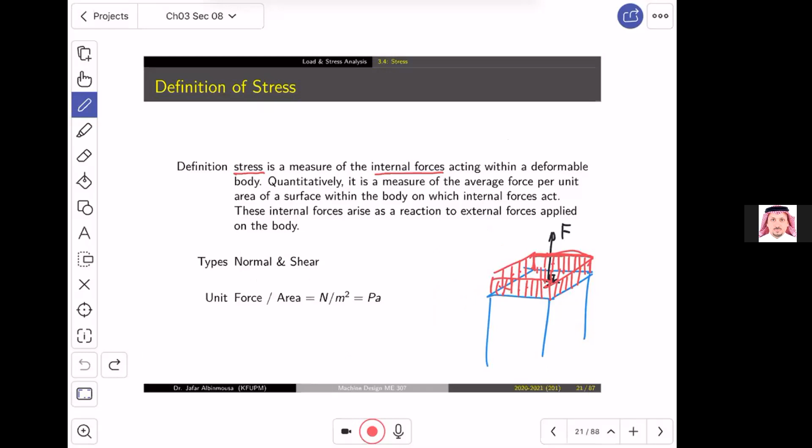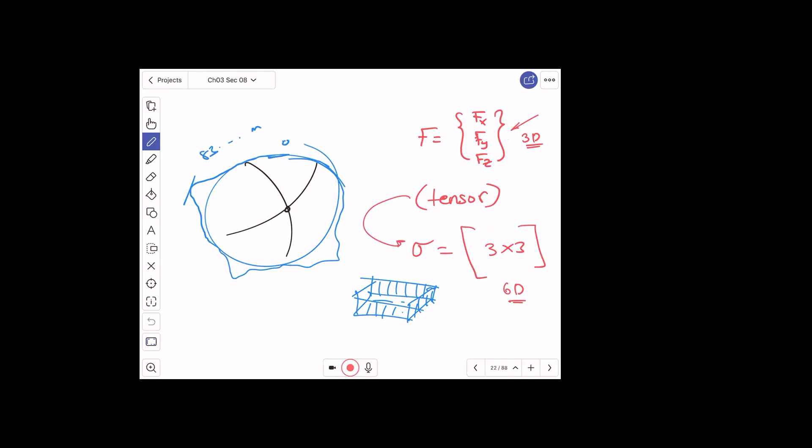Okay, akhwan, all right. So last class we stopped right there, when we talked about stress. We said that stress is a field, and mathematically it's a tensor, not a vector. We said that probably the best way to describe stress is by a surface. Whenever there's a surface, you cannot just point to a value of the surface without telling me where on the surface you want me to measure it. This is pretty much what stress is all about.

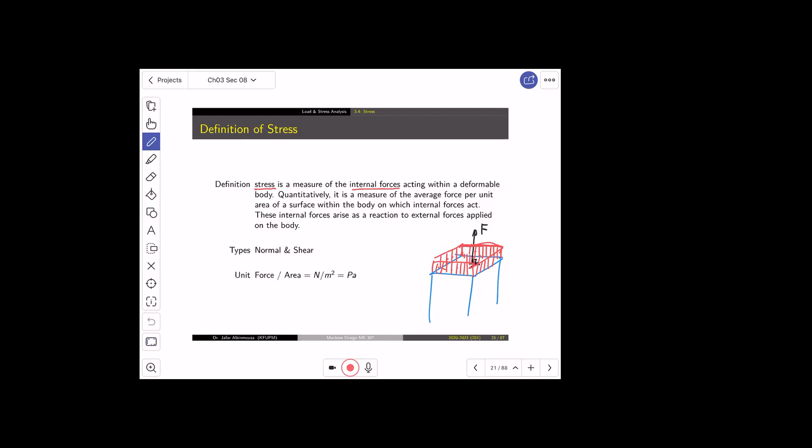So again, just to remind you, stress is the measure of the internal forces acting within a deformable body. The unit of stress is the unit of force divided by unit of area, which is Newton per meter square, usually called Pascal. We usually measure stresses in megapascal, and most of the time we measure values like modulus of elasticity, which is measured in gigapascal, because they are much larger, especially for metals. But you are all familiar with the unit system.

Now, so to summarize, what we're going to talk about next is the normal stress. So what is normal stress? It's a state at which the stress field acts normal to a given plane. Stress field, don't forget, acts normal to a given plane. So whenever you have any plane, and there is a stress which is normal to it, we call it normal stress.

And if you remember, we used to plot the cube, and we said that sometimes there is a shear stress, which we represented this way. Now, of course, many times we're not going to put too many arrows just to waste time and make me tired trying to convince you that this is a field. It's always a field, we represent it by one arrow. Now, this is shear stress.

Interestingly, ya akhwan, all kinds of deformation you can imagine—if you take a cheese, a block of cheese, and deform it the way you want, or you take dough, ajeen, and form it like a pizza, like a sandwich, it doesn't matter—all kinds of loads that you put on it can be described by normal and shear stresses, which is very interesting.

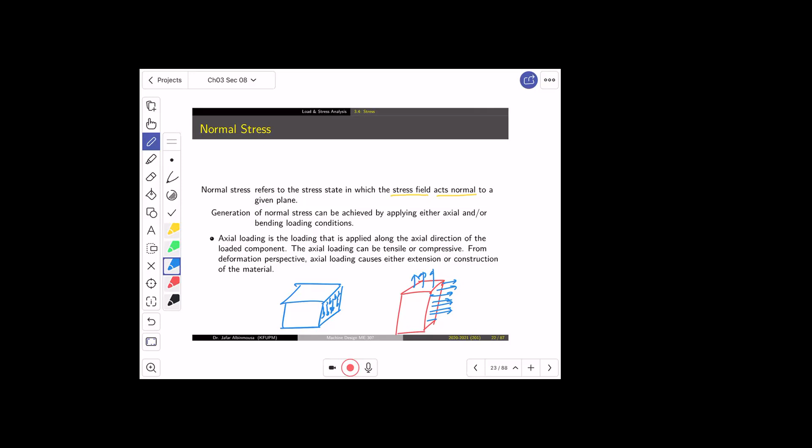You should know that we have normal stresses and we have shear stresses. What we are talking about now is the normal stresses. They always act normal to a given surface or plane.

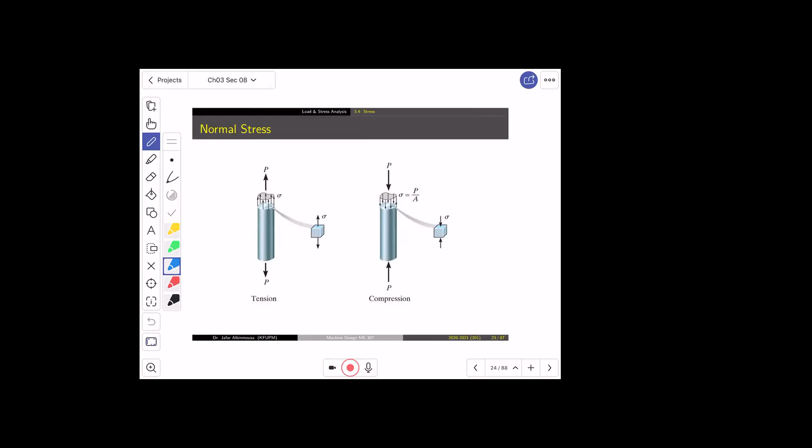This is an illustration. What you see is a force P applied on a surface in tension, and this is the same force but applied in compression. Tension and compression are both normal - they will create normal stresses. The only difference is their effect. The deformation resulting from a tensile stress is extension: the part will become longer. Compression will cause the part to get shorter.

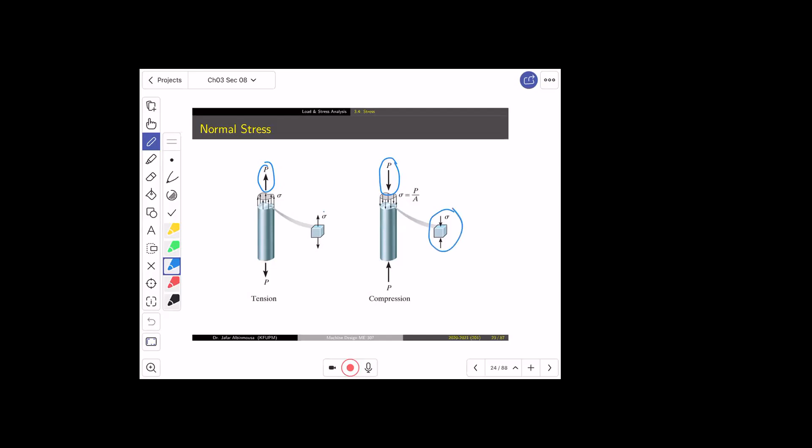Now, what I would like to tell you is that this representation of a cube with one arrow, two arrows, is very important and critical. I don't want to confuse you, but I want to give you a little bit of illustration on what this means, and it will also answer a very interesting question I raised before about why we are dealing only with stresses.

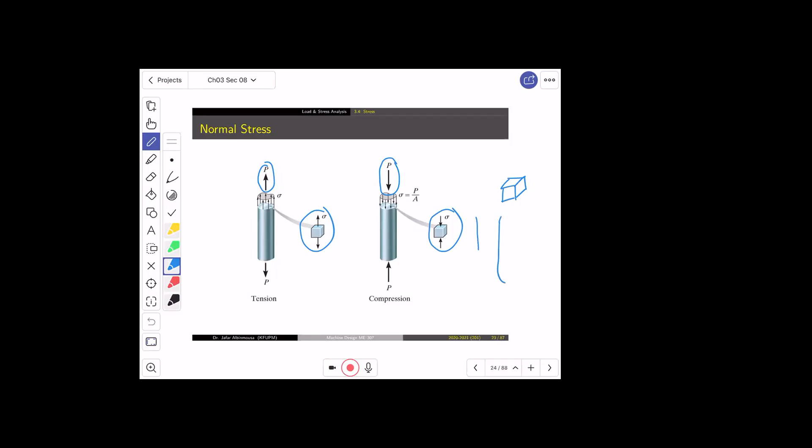This cube is an infinitesimal volume. Infinitesimal volume means it is a representation of a little tiny piece - imagine this is the specimen, the stress-strain tension specimen that you break in the material science lab. The volume is sitting right there on the surface, and it is really tiny. It's just a manifestation of the limit when the delta volume approaches zero, not infinity - sorry, it doesn't go to zero, but it approaches zero.

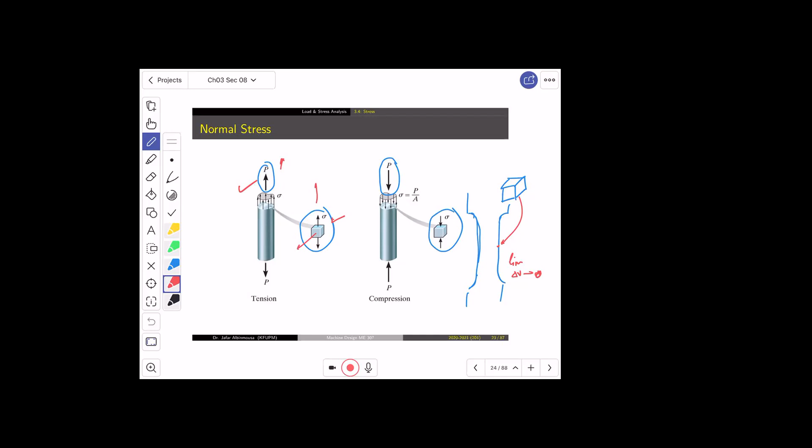So that little tiny cube, if you have tension like in this case, you will have a cube having one arrow pointing in the same direction as the force. Now, if for any reason you applied another load, you will get another arrow. You may get another arrow. If we have three arrows, this is a triaxial state - tri means three.

So this becomes a bit difficult, not easy. You need to study matrices. You need to go back to the origin of stress as a tensor. For that reason, we only do the three-dimensional state in graduate courses. Within your undergrad, the maximum we go to is two, which is a plane problem. So if you apply one stress, you'll get one stress. If you apply two, you get two. If you apply three, you get three. And you tell me, okay, what is so fancy about this?

We know this. And I tell you, if you do strain, it's totally different. In strain, if you apply one normal stress, there are other strains that are going to be generated. Inherently, the strain state is triaxial. That's why it doesn't make sense to teach you strain here. That's to answer a question I raised before: why are we dealing with stresses and not with strains. This is probably one of the reasons.

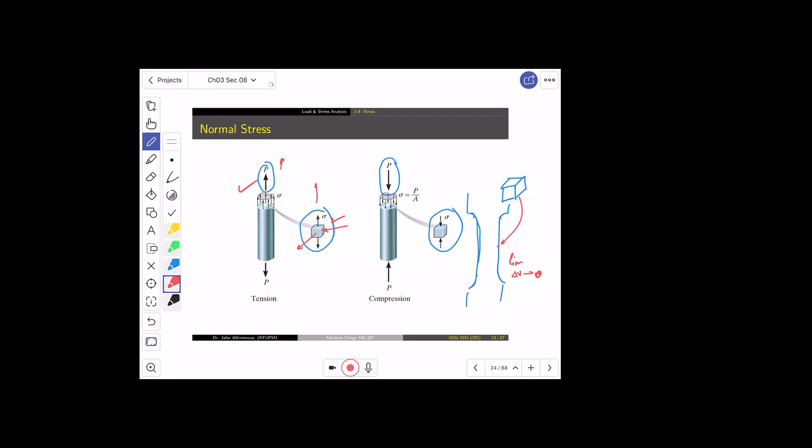So, one tension, one compression - both of them are normal. And what you should know is that normal stress can also be generated using a totally different creature, which is the bending moment. Now, look carefully at this cross-section: the arrows are pointing perpendicular to the surface. So this is a normal stress.

The only distinct feature about bending is that it creates tension and compression, both in the same cross-section. But both of them are perpendicular to the surface, so they are normal stresses.

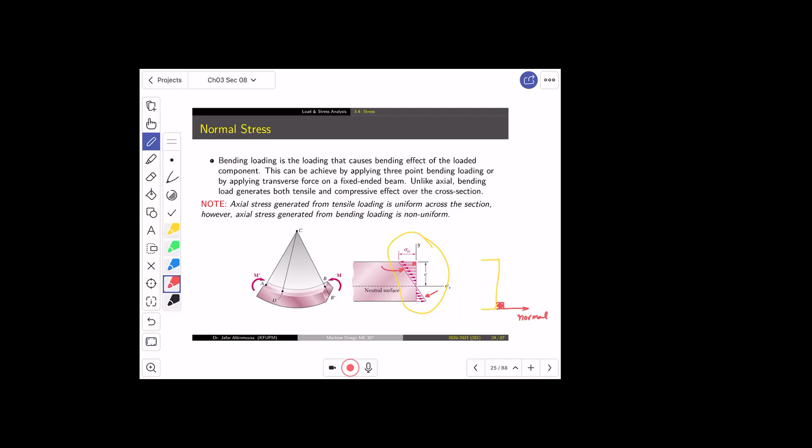So indeed, the difference between a force like this one is that it will create a constant normal stress everywhere - the value of the stress is, let's say, 10 megapascal everywhere. This point, this point, this point, all points have the same value. So this is like an equation, y equals a constant, or x equals a constant, depending on how you look at it.

Now, in here, no - this is like y equals ax plus d, a linear distribution. What we are interested in is that this distribution, we call it uniform distribution.

This is uniform. It doesn't mean that it has to be constant, and it can be described mathematically by relations, equations. I am not talking about a cross-section which has a stress distribution like this, where the stress is randomly changing in a different way. No, this can be described mathematically.

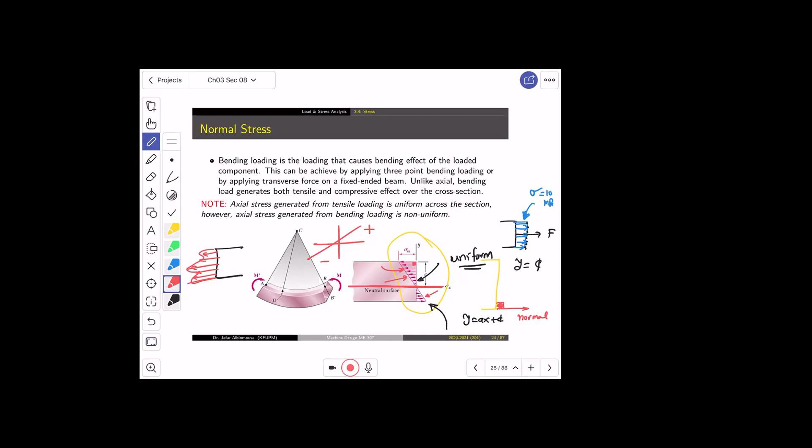Now, with respect to stresses, the interesting question is: can we add them? If you ask that question generally, it cannot be answered. You should ask back, what stresses do you want me to add? Because you cannot add normal stress to shear stress. There is no way you can add them.

Normal stresses, however, you can add together, because they are the same species, the same creatures, if you want to call them that. If they are positive, they add to each other; if opposite, they cancel each other. The way we add them, as in this example, is very simple.

For example, if this stress is 10 megapascal, then every point in the cross-section has a stress of 10 megapascal. But this other one, the normal distribution from bending, might have a maximum value of 5 megapascal, which is negative at the top, and positive 5 megapascal at the bottom. You go down until you reach the middle, where the bending stress is zero.

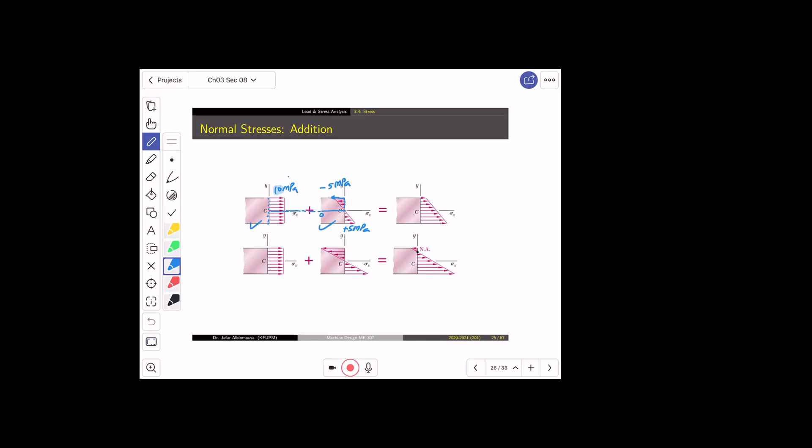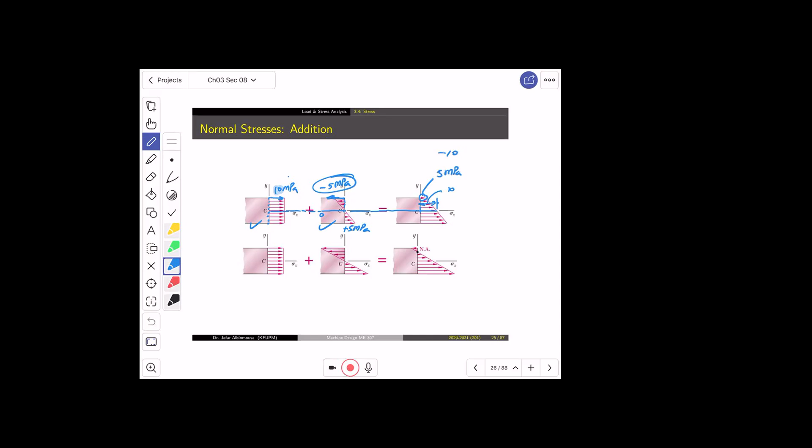So if you add the stress at the middle, you get 10, because 10 is added to 0. But at the top, you have 10 megapascal minus 5 megapascal, giving a positive 5. Going down, you have 10 plus 5, which gets bigger, becoming 15, and so on. You have to add them one by one.

It doesn't matter which cross-section you start with. The same cross-section subjected to tension will have a uniform stress of the same magnitude everywhere. Then you add bending, which causes compression at the top and tension at the bottom. If you add uniform compression as well, you can add this with that—it doesn't matter—but you add them one by one, meaning this value with this value with this value, and the next, and so on until the end.

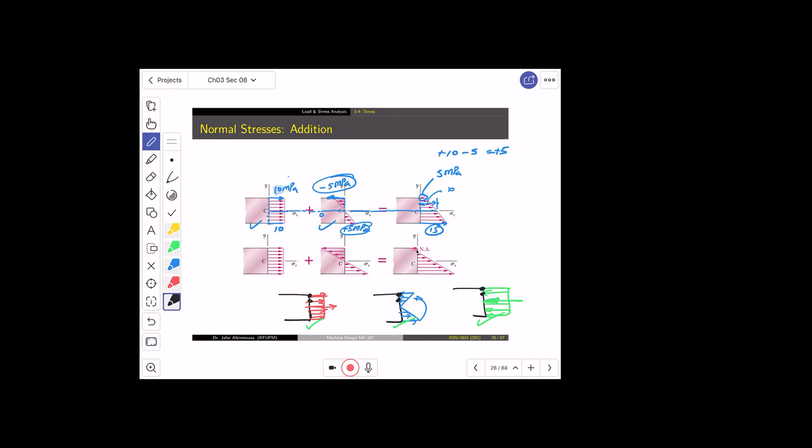Did you get this? Is it clear, guys? Any questions? Okay, hopefully this is a good warm-up for you, because we're going to move on to bending now.

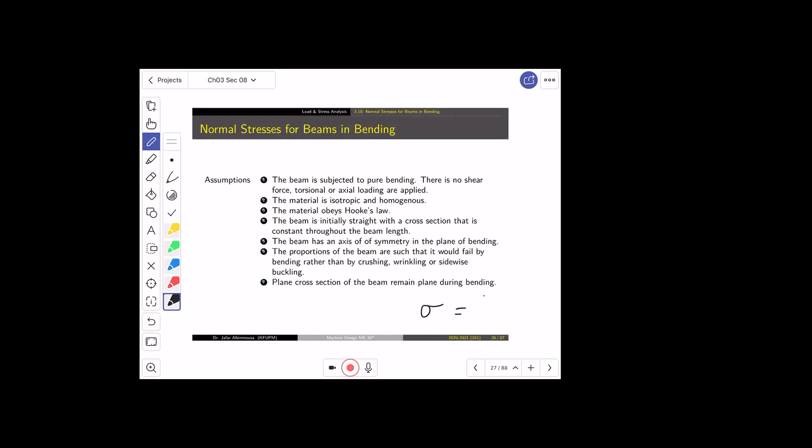Bending, from the end, is described by the famous equation sigma equals M c over I. This is a simple equation that came from many assumptions: the beam is subjected to pure bending—no shear, no torsion, no axial loading. The material is isotropic and homogeneous, it obeys Hooke's law, and the cross-section remains straight and doesn't change, and so on. Many of these assumptions don't hold in real life, but this equation still gives a good approximation—actually a very excellent one. That's why this equation is used a lot.

The reason it works, especially in mechanical design, is the fact that when we design things...

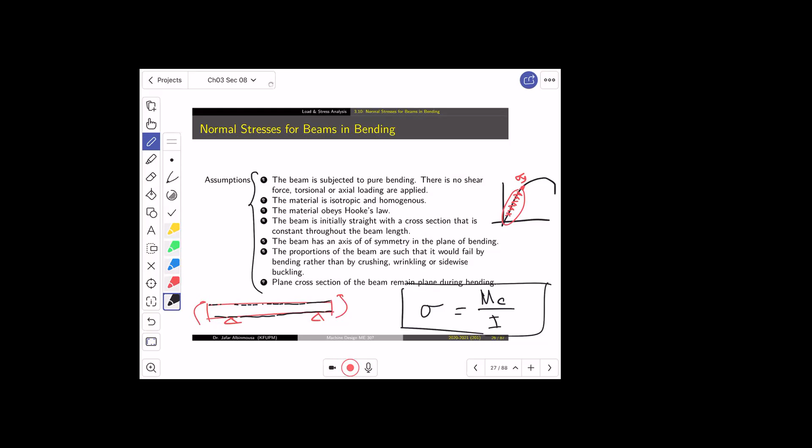But if you deform something really significantly, then the values generated by this equation may not stand or hold—they will not be correct. Now, here we need to spend a little bit more time.

We will spend probably the next 15 minutes or something on this slide or the next one maximum. So I need you to focus with me.

Now, the first rule we need to teach you about bending is that while the loading is happening in what we can feel like one plane, the stresses are generated in different planes. Let me teach you what this means. First, before we do that, we need to put a coordinate system.

Now listen to me carefully. The coordinate system that we will agree to use, all of us, always, is a right-handed Cartesian coordinate system. What does right-handed coordinate system mean?

If you recall from orientation, they taught you how to multiply unit vectors using the cross product. They told you that if you multiply i by j, you get positive k. If you multiply j by k, you get positive i, and so on.

So what are we going to do? The first rule is this: it can be changed, but most of the time, like 99%, we are going to put the x-axis normal to the cross-section, just like in this picture.

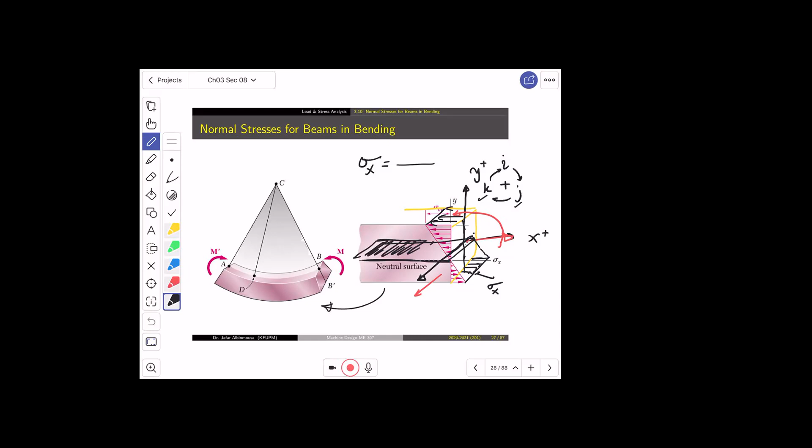If this cross-section belongs to this... now, of course, right in the middle over here, we have the neutral axis, or as it is named in the slide, the neutral surface. Why? Because if you draw it in 3D, it's an entire surface. Good? So how did I generate the normal stress?

I multiplied m, which is this one. So what is this m? Is it mx? Is it my? Is it mz? I think mz. It is z. MZ. It is mz. So why is that?

Because if I look over here, I can see that the normal here is the x direction, there is going to be the y, and here is going to be the z. So if I apply the right hand rule again and rotate in the same sense as m, the thumb will point toward z. So it is actually a positive mz. Good.

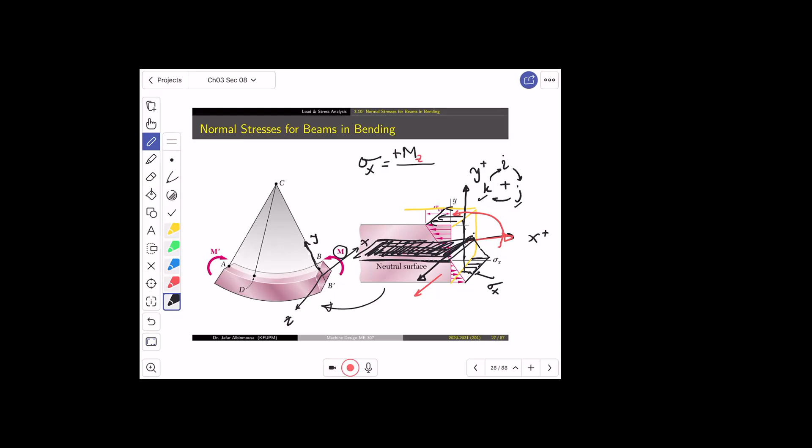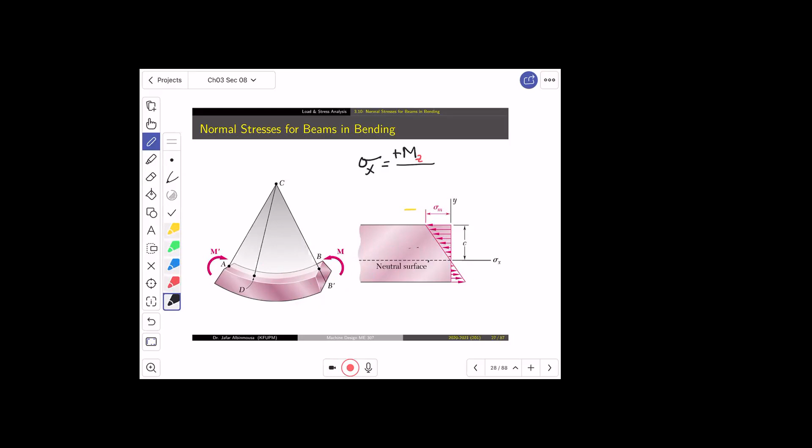Okay, now let's move on. The next part is what? Is the C, which is actually, the distance from the neutral axis all the way. Do you know what we call this line?

We call it a fiber. This line is also a fiber. So we say that C is the distance from the neutral axis to the top fiber or the bottom one, depending on where you want to calculate the stress. Do you want to calculate it here, or do you want to calculate it here? We can call this one C1, we can call this one C2, because they are different.

If they are the same, when the neutral axis is in the middle, then it doesn't matter, we just call them C. But in reality, if you want to know the distance here, is this y, x, or z?

It's Y. This one is positive Y, and this one is negative Y. Now, the real equation says that when you do this, you should multiply it by Y.

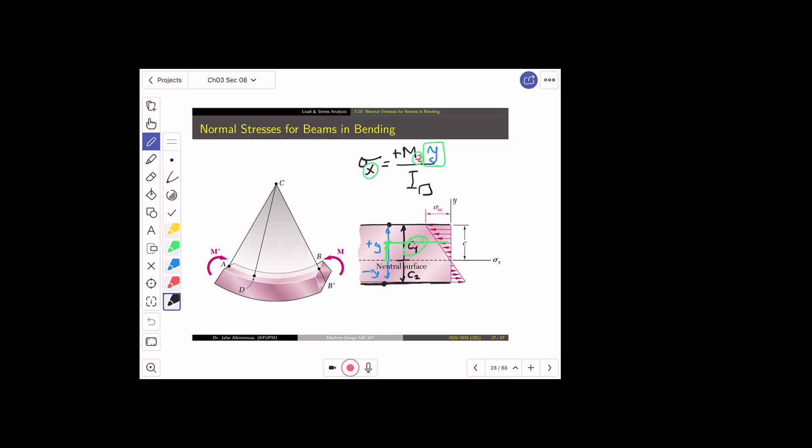Moment of inertia is just like A, while A is measured in meter square, which is the area, okay? And moment of inertia is measured in meter to the fourth. It's a bit higher order than the area.

Moment of inertia is associated with bending. And I am going to give you, by the end of the class, an example which will make it very easy for you to feel that the moment of inertia is indeed related to bending. It can describe what is happening in bending.

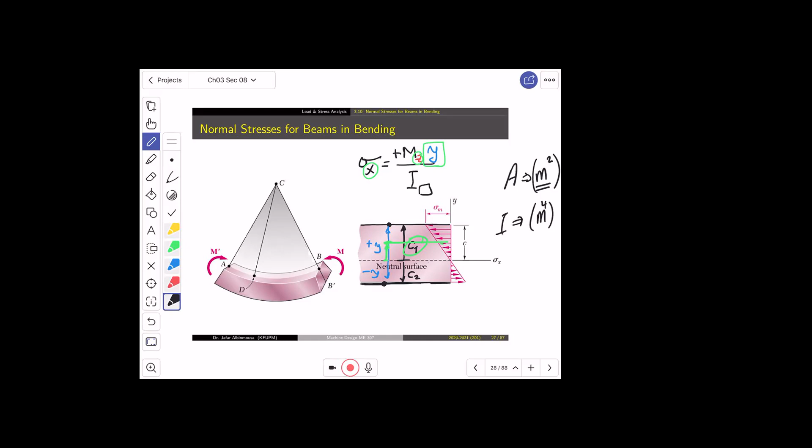Now, I want one of you to tell me: if we have a cross-section, which is a rectangular cross-section, like this, we will call this one N, and this one we will call M. Do you see that?

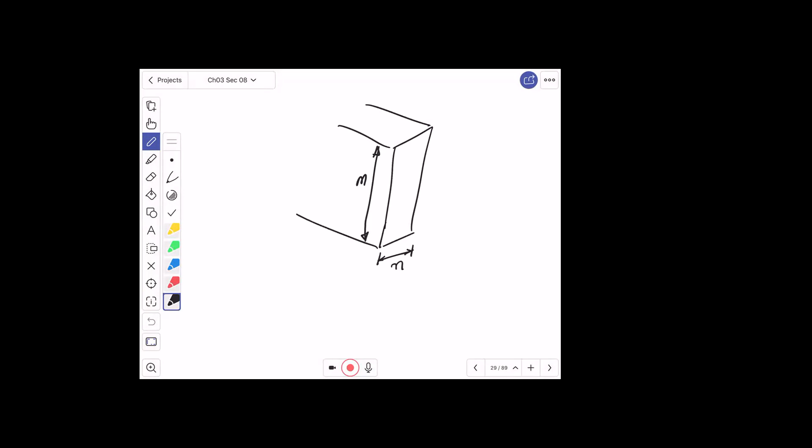Okay, now what did I do? I will construct the positive coordinate system. That's Y and that's Z. And let's say, just like before, we had a moment Mz, which is positive, by the way, because the thumb is pointing toward positive Z, since negative Z is here.

Okay, now clearly, what will happen? Think of the moment as if it is stretching the material from the bottom like this, and squeezing or compressing the material from the top like this. So clearly, this is the distribution, and somewhere in the middle we will have the neutral line.

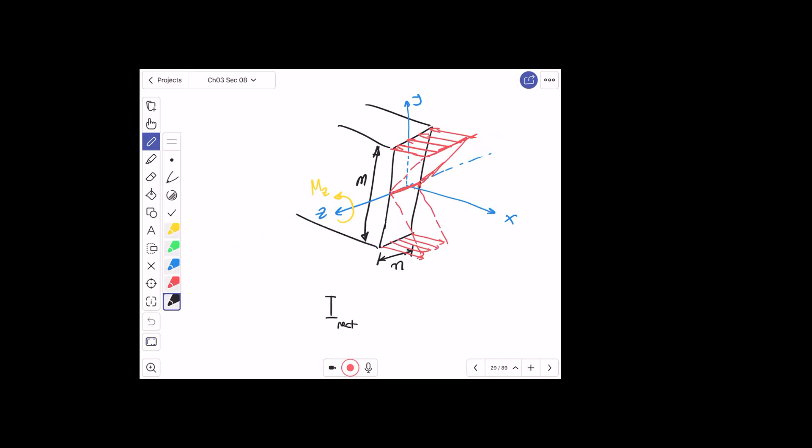Are you good, guys? Yes, good. Okay, now the question is this: can anybody remember what is the moment of inertia for a rectangle? What was it? One over 12 base times height.

One over 12? Base times height. Base multiplied by the height cubed. Now, those who said the moment of inertia is BH cubed, they need to be very careful.

That's the reason why I call this one N and I call this one M — so that you don't focus on the letters. They are meaningless, and I'm going to show you in a minute that you can easily make a mistake here. The question right now is: within this, what is the base?

What is the height? It depends on the moment of inertia about which axis. Okay, I give you a problem, you should know it: which one is which? The base is N.

The base is N, the height is M. Correct? Who thinks it is the other way around? I think you need to specify about the Y or about the Z, if I remember correctly.

For that reason, if we attempt the same problem again, okay? And this time, while we have X, Y, and Z, this time I applied the moment along the Y. So this is MY, and it is positive, by the way. The thumb will point up, so it's a positive MY.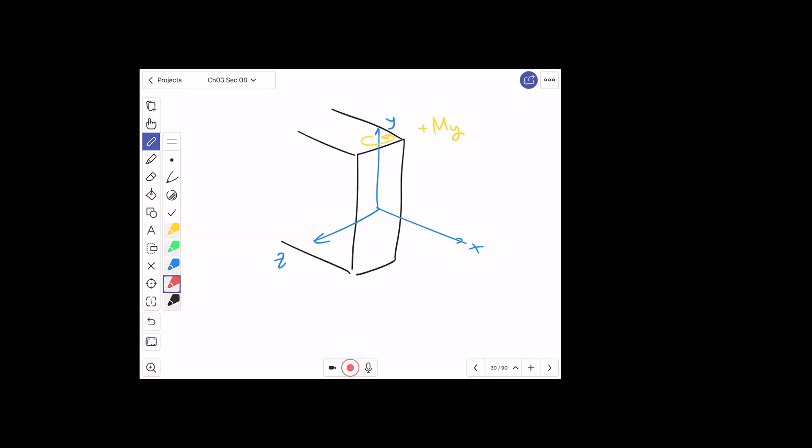Now look what will happen. Right here, there will be tension — the last fiber, the fiber at N. Over here, there will be compression.

Where is the neutral line? The neutral line is going to be right there. Now if this is the neutral line, we said this is M and this is N. Now, I equals to 1/12 the base times the height cubed. Where is the height right now? It is N. And the base is M.

Do you get this? Now, look, what is interesting. The equation is still sigma x. Why? These stresses are pointing toward x.

So I have an equation which says that my... and then what is this distance? What is it? It is Z. Yes, it is Z divided by I. And this I is measured like that.

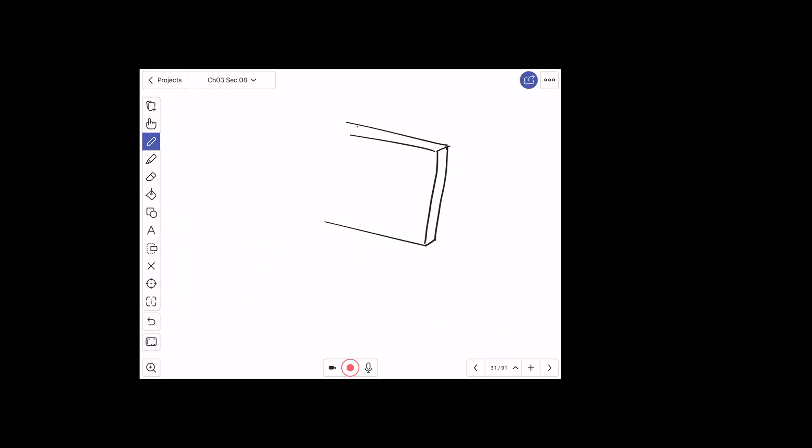Did you get it? Okay, now let me tell you this thought experiment. Now what happened is this: if you take a ruler, which most of the time, if you go to a stationery store, rulers have a cross-section like this. Am I right? But I'm going to assume that you found a ruler which is completely rectangular in cross-section.

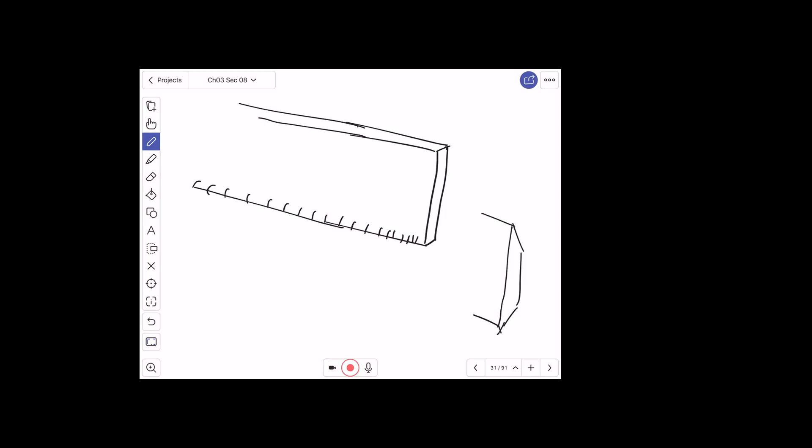Now this is the ruler. It's very long, let's say 30 centimeters. These are the grids. And the question comes like this: if you give this ruler to a kid and you tell the kid to bend it, the kid will bend it along this line, and of course the ruler will bend.

Is that true? A kid, even 3 years old, he will bend it. However, I dare you to name one human being that can bend it along this line. I said human being, I'm not talking about the Avengers. No movies, no fantasies. Give me the name of a real person who can bend it this way.

No, I don't think so. Nobody. It's just so hard, you need a machine.